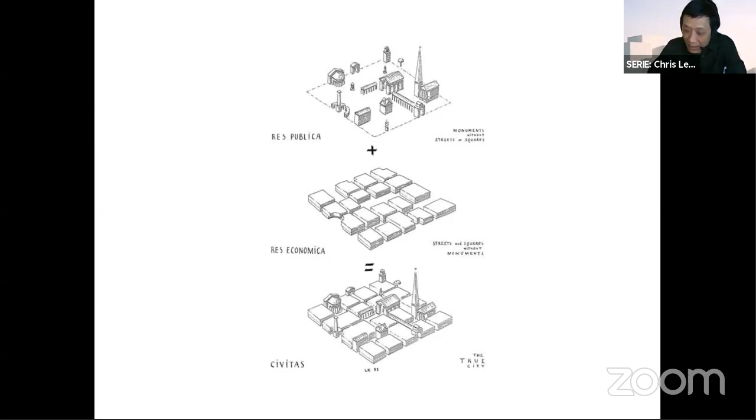Now, a very good example, and I find this the most instrumental part of Rossi's work, is the Palazzo in Padua, which he says is an urban artifact because it's both permanent but also evolving, propelling. That's because the palazzo has been able to accommodate changing functions or programs within the building. It has changed from an aristocratic residence to army barracks to a market to a school and vice versa. And because of that, the structure is actually independent of programmatic failures and redundancy.

So because it is a structure that is permanent and allows the program to evolve within it, it is involved in the evolution of the city and also permanent, thereby holding and accreting the memory of the city.

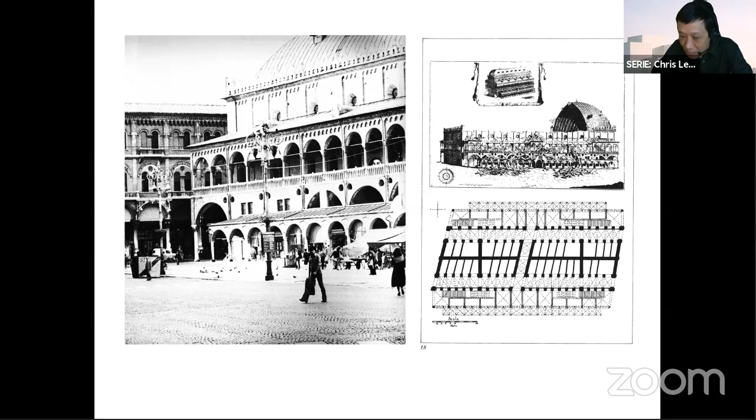One very crucial aspect, which you see at the bottom right of the drawing here, is the diagram or plan Rossi extracted from this example. It is basically the dividing walls and the series of colonnades that the palazzo holds, and it is this very same structure that Rossi used again and again in his first three projects in the early 70s.

So in the first project, even he says this, it is essentially the same deep structure that is transposed to become a Milan Triennale project, in which the same walls that you see in the deep structure diagram that Rossi uses here are elongated, and in which the width and distance between the walls contract and expand to create at some parts incredibly wide and open spaces, and at certain parts become incredibly and unusually narrow

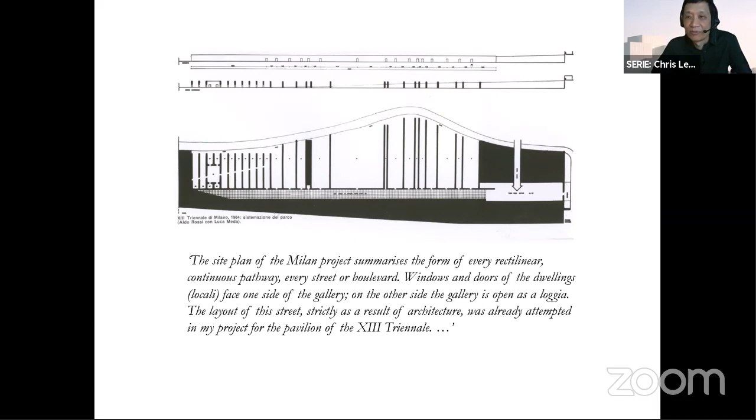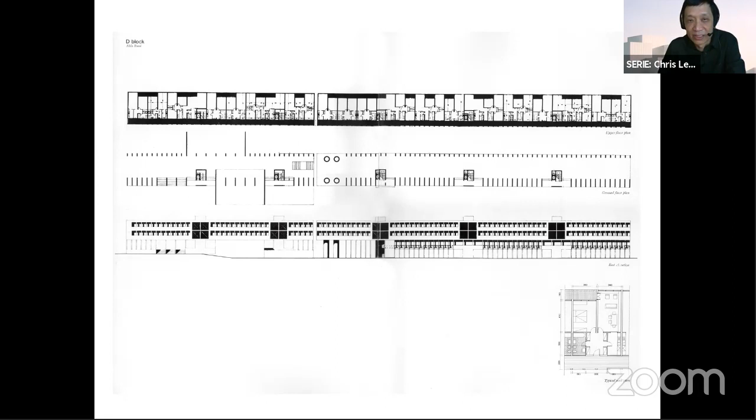And the same structure then is imprinted on the ground as elongated walls, as porticos, as a colonnade. So thereby bringing two moments, the moment of housing and the moment of the city, as the colonnade of the city, into a single moment of architecture. So I think it is here, in Rossi's project, that he draws on the lessons from the persistent architecture of the city, and then retransposes them as a moment of both housing and monument, vis-a-vis the architecture of the city itself.

So I think this is incredibly instructive, where the resultant architecture could be seen as an open framework, an architecture that frames, but also is open for programmatic permeation and for social life to unfold. So now moving on to another example. Now this is looking eastwards, moving from the west.

Now if I were to say that the deep structure of the historical European city can be understood as the dialectics of rule and exception, right? Housing and monument. Then the Chinese city, I argue, is constructed out of just one dominant type, the courtyard house. Or to be more specific, it is essentially the deep structure of the walled pavilion.

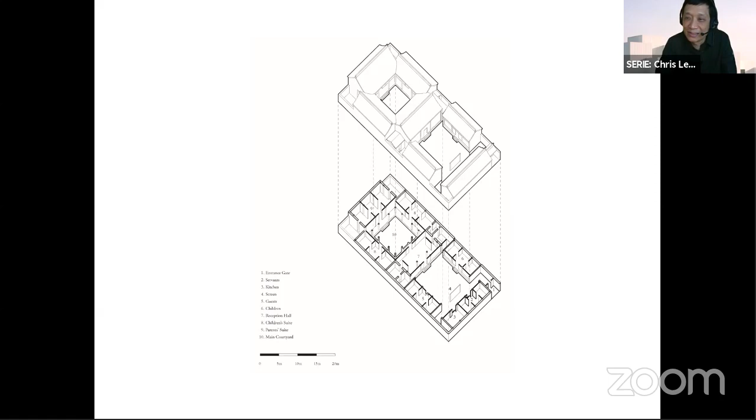Now, the Chinese courtyard house therefore should not be confused with all other courtyard configurations the world over. The most pronounced difference is that the void of the courtyard is not carved out of a mass. Instead, it is formed by the placement of one or two-story single-room pavilions that are then walled off from their surrounding. These courtyard houses aggregate to form entire neighborhoods. In Beijing, they call them hutongs, leaving very narrow lanes between the courtyard houses.

This is also because the Chinese courtyard house does not have an articulated frontal elevation, for it will never be viewed in axial perspective from a distance. Instead, it is always experienced in sequence, where one moves from wall to courtyard to pavilion and yet to another courtyard, and the sequence continues. So this sequence of open and closed space, a space for nature and dwelling, in a sense reifies the very concept of yin and yang, that is to say the alternation of binary opposites.

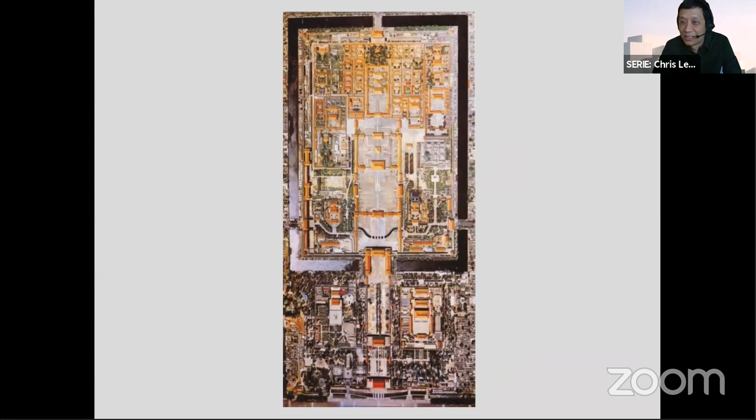So this singular deep structure defines the entire city at various scales. For instance, you see the city of Beijing from the Ming dynasty onwards and pre-1948, a compound. And further down, of course, the walls of the neighborhoods, and finally the walls of the courtyards.

Chris, we lost connection for a minute, so we couldn't hear. We couldn't, really? For a minute? That long? Well, no, maybe 30 seconds. Only from that slide. Only this slide, yeah? Okay.

Onwards to 1948, for instance, it is defined by various city walls, right? One that defines the extreme border of the original city, and the other wall on the south defines the extension, and then the scale down. Here you see it then encloses the imperial compound, and further down the walls of neighborhoods, and finally the walls of the courtyard house itself. So they all demonstrate the same deep structure, that is to say walls enclosing an agglomeration of pavilions.

Now, another important observation that can be made here is that the deep structure of the city here is the same as what Rossi has said. This is independent of program. That is to say that the same courtyard house serves as dwelling for families, for administrative offices of the state, schools, clinics, clan associations, and the multitude of social and cultural life that you find in the city.

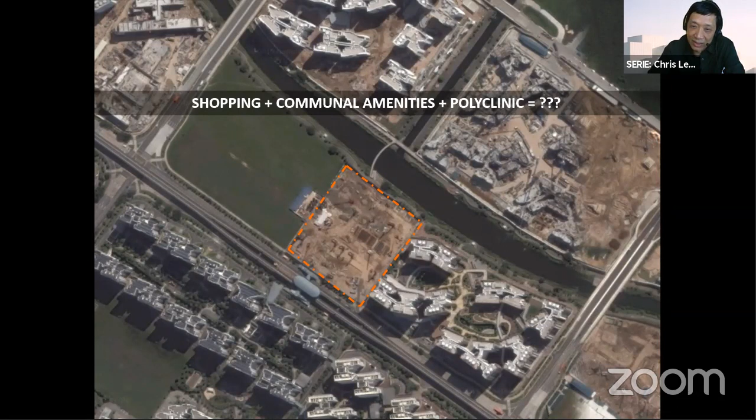Essentially, it's an integrated neighborhood center that will bring together communal amenities, shopping and polyclinic, sandwiched between an LRT station and a waterway. And the focus of the brief, unlike, let's say, other developer-driven commercial development, is to provide great public spaces to strengthen community bonding in the large HDB estate.

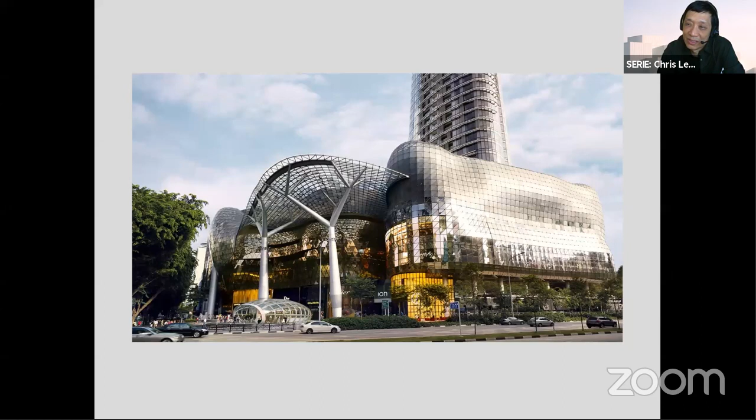So looking at Koolhaas in his Harvard Guide to Shopping, he wrote that, quote unquote, shopping is arguably the last remaining form of public activity. So although insightful in certain measures, I do think that there are other ways in which public activity could be nurtured. However, to date, the architecture of shopping in Singapore is this. It's a ubiquitous shopping mall, superfluous monuments of consumption as public activity. So its role really is to internalize all activities, drawing lifeblood from the streets and the city itself.

So the main challenge for us for this project is therefore not only to bring these three very, very different programmatic components together in a new building typology, but also to harness an architectural grammar that could create meaningful communal spaces, and through that to script a programmatic strategy that could foster a sense of belonging. So where do we start? And where do we look for precedent?

So we thought that with more than 80% of Singaporeans living in public housing, the architecture of this housing has grown over the years and could be termed as a common architecture, right? An equalizing artifact that is able to accommodate the plurality of life. So this architecture of HDB is actually very, very unique, at least in Singapore, although they draw a lot from architectural modernism. And what I find interesting, especially those that arose in the 70s and 80s, is that it has this quality of an open framework as an unassuming structural expression of what it contains.

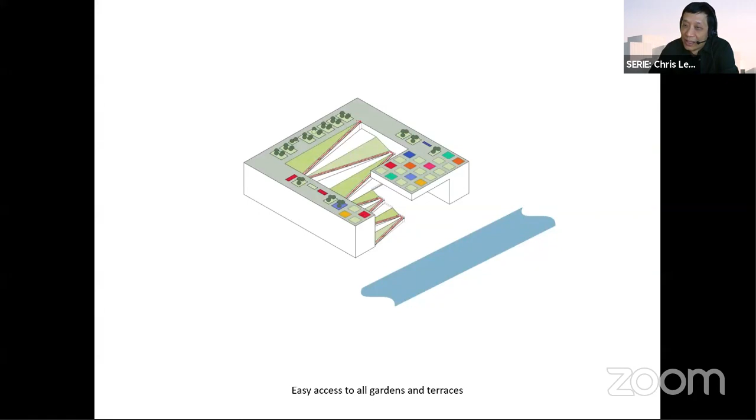So our first thought was that the neighborhood center should be conceived as a singular building that frames and cradles a garden. The garden fronts the waterway, creating a natural amphitheater towards the water edge. This garden cascades down the entire height of the building and draws program and dining activities to the water edge. A gentle ramp provides easy access to all gardens and terraces, and they articulate the surface and slope into several terraces. The plants define and shade each of these terraces, and every level on the wings of the building has direct access to these gardens.

So shopping is visible, it's vibrant. Eating activity spills out onto the veranda, but they never drown out the public realm. And the terraces are filled with outdoor communal spaces. Here, a children's playground next to the pediatric clinic. And as the garden matures after a year, you see that the ramp now cuts across the different terraces, with each turn revealing different pockets of communal spaces, a hammock, a seat, a platform to stretch out, and so on.

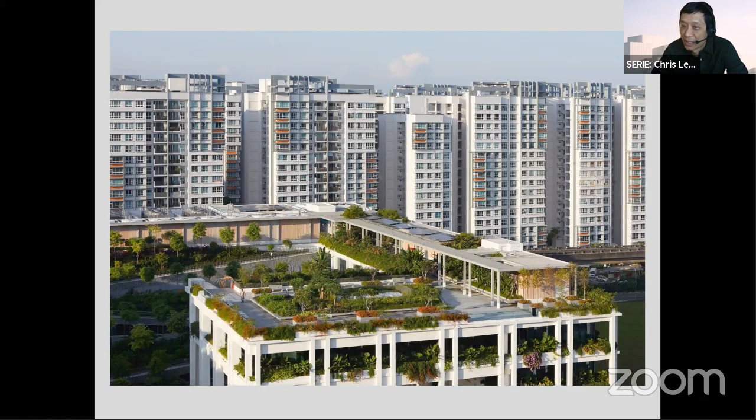And upon reaching the roof, as you turn your gaze back onto the terraces, enchanting views open up to the waterway and beyond. So the terraces here continue to the roof and are used as urban farms for the community horticulture clubs and also exercise areas for senior citizens.

So together, the communal spaces envelop the entire project and are accessible from the ground all the way to the roof. Now, upon framing the cascading garden, the second act of framing defines the sheltered community plaza. So this is a well-defined volume, 4 stories tall, and is sheltered from the elements. The pedestrian circulation is threaded through its sides so that meaningful space could be defined for public use.

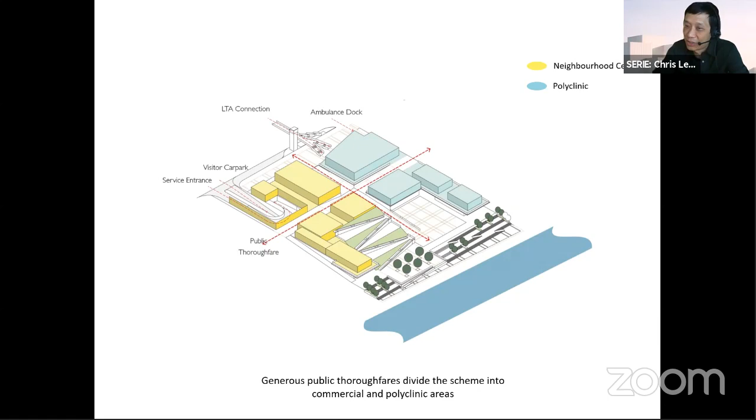A generous public thoroughfare divides the scheme into commercial and polyclinic areas, and the pedestrian path links the neighborhood housing sites together and stitches them as a collective whole. And it draws pedestrian movement from the station and Punggol Drive.

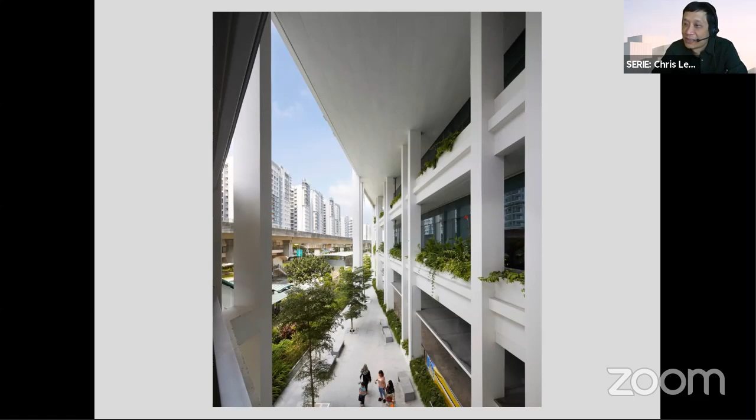The entrance is accentuated by gently angling the facade facing the station, and it creates a doorway into a triple volume entrance and a funnel space that then leads pedestrians onto this 4-story height sheltered space. And this volume is also strategically placed at the crossing of the waterways and the landing of the pedestrian bridge.

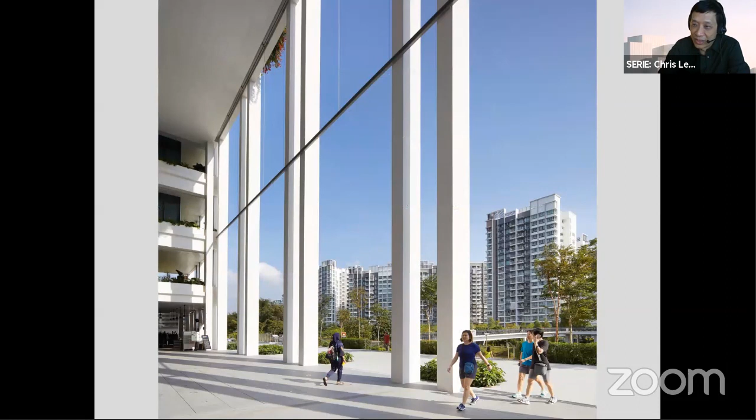And the space is framed by a set of double columns, giving it an open facade with a plaited grid of an AB rhythm. And when it rains or when the sun is at its most searing, blinds will drop to further shade the space. So this deliberately porous facade both defines and allows the permeation through this threshold. And this portico entrance really, for me, gives a sense of dignity as one passes through the threshold of the space.

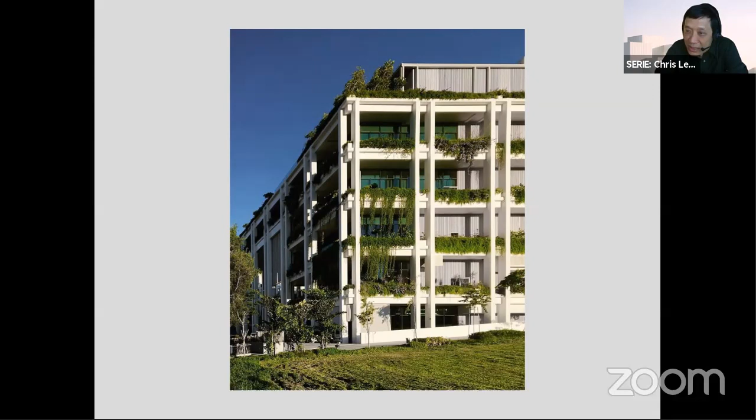And as each floor is surrounded by open terraces and hanging gardens, which overlook the garden on the platforms, they also become a key feature of the elevation. So this third element, which is the facade, thus possesses a depth that overlays the vibrancy of its content with the nature that surrounds it.

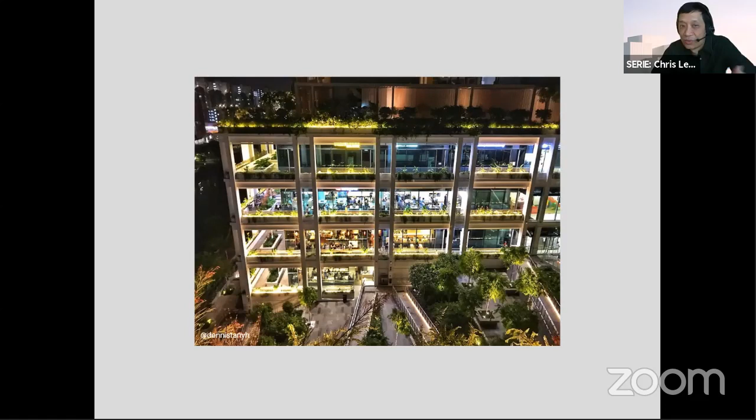So this depth also translates into veranda spaces for communal dining, and it activates and spills out to enliven the facade of the project. So here, for instance, you see the dining gets activated after the sun goes down. The verandas are also sheltered from rain by using roller blinds. So here is when the blinds are fully drawn, and the service facade is clad with precast stained concrete, and together with the double columns, I think it does offer a certain richness and animation to the face of the building.

So on a meta level, this illustrates what I've been talking about previously, that the project is seen as having a wider role. In a way, it conceives and cultivates a sense of commonality. More often than not, you see that architectures that are restrained, rational, repetitive are criticized or derided for their lack of exuberance. But precisely, I think these are the very qualities of the architecture of public housing in Singapore. And we should understand that this architecture is mute, but one that also enables the color of life to flourish.

So similarly, the cultivation of a community and sense of belonging requires a common framework. So it is precisely this that we wanted to distill and revalidate into our own architecture, very much like what I would think Rossi would have done.

Second project before we break for another translation: the new School of Design and Environment in the National University of Singapore. The site of the project is located at the south end of the existing school that was built in the 70s. And the available plot is actually very tight for the additional building. Looking from the approach to the south, the site is a small hill surrounded by mature rain trees.

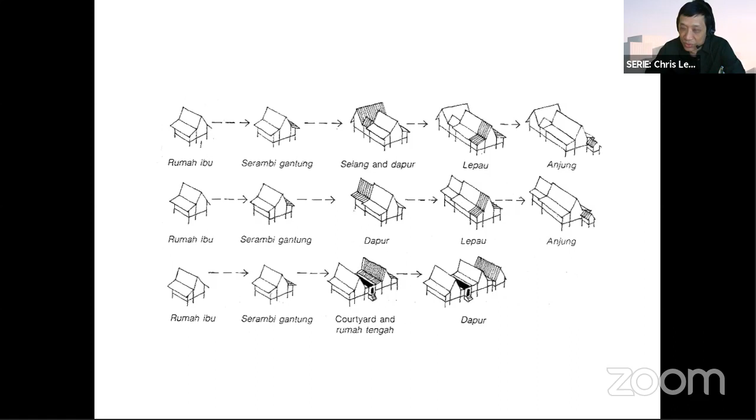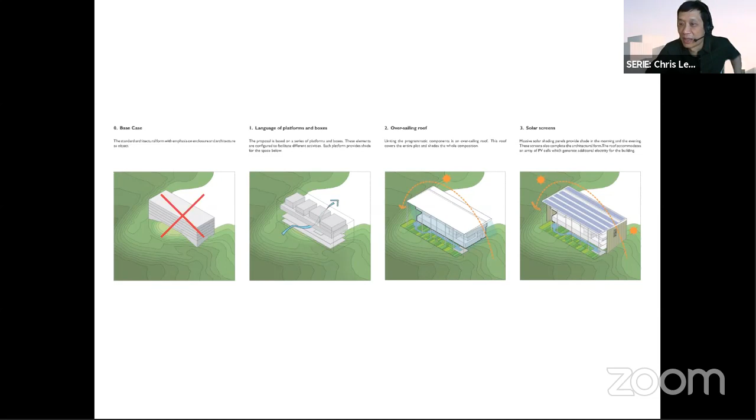Now, perched on top of the hill, the new building is composed as a series of boxes loosely placed on a large platform. A large roof shields these rooms from the overbearing sun and harnesses its energy. And a large 5-story screen which buffers the spaces cuts away the direct east and west sun. So the result is a school that is very clear and very legible in its organization. It's open, it's permeable, and without the associated heat gains that you find in the tropics.

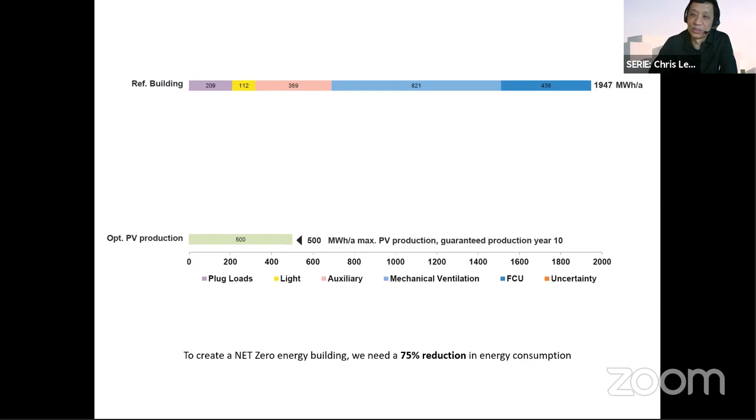And the completed building, as you see here, just completed last year, is perched just above the tree canopies. The large roof is used as an expansive solar farm as well as a teaching space, where a total of 2,444 PV panels are placed. Now, the maximum energy the PV cells can produce based on the limits of the site is just 500 megawatts. However, an educational building of this size typically uses close to 2,000 megawatts. So to create a net zero energy building, we need a reduction of 75% in energy consumption.

The conventional approach to cooling buildings in a hot, humid climate is usually to use an operative temperature of 24 degrees. However, if we instead use what we call an adaptive comfort approach, we can use an operative temperature of 27 degrees together with tempered and moving air. In other words, we feel thermally comfortable if we can remove heat from our body, rather than the conventional approach of blowing cold air onto our skin. And this is where the energy saving comes from.

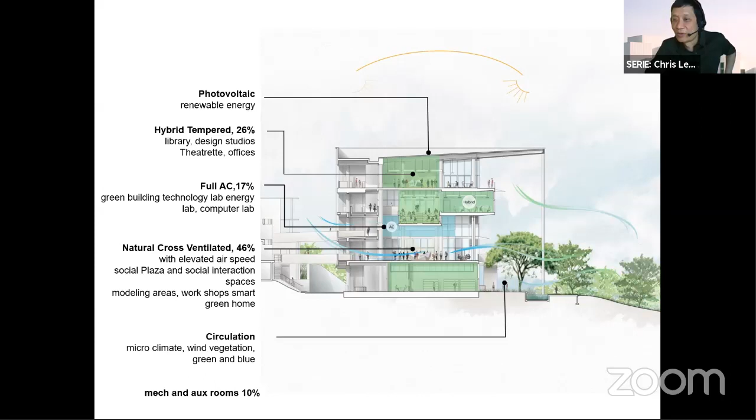So sectionally, the spaces are configured to be very shallow. The building hovers above open platforms, allowing natural cross ventilation to cool the spaces, so that it utilizes only 17% conventional AC cooling, reserved for labs. 46% of the cooling will be through natural ventilation and 26% from hybrid cooling. As you see in the graph, relying largely on how we design and arrange the volumes and using platforms and overhangs, we were able to achieve close to 75% energy saving, with 76.5% saving from the cooling loads alone, bringing it all the way down to a net zero energy building.

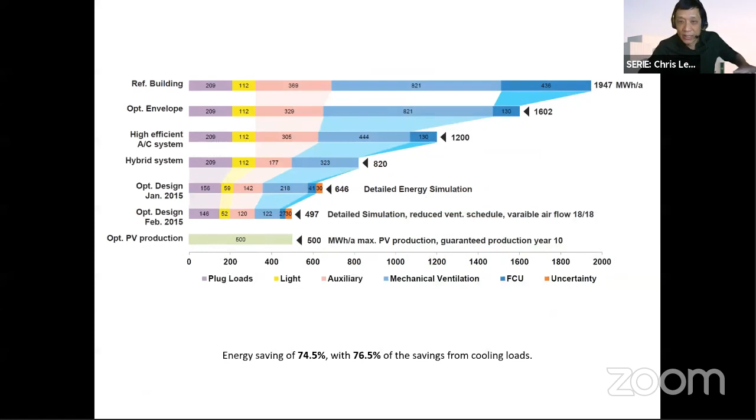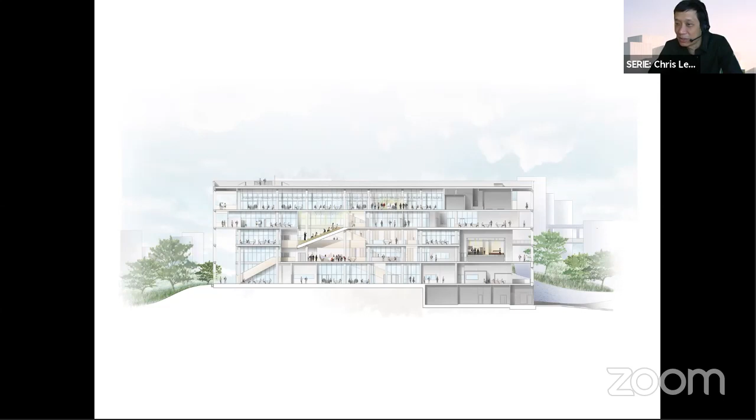Here you see in the section the crit space dropping down into the raised social plaza so that it is visible from all approaches to the building. This space is also directly next to the open studios and main circulation spine in the foreground, so it's the most visible part of the city. We felt it's very important that the act of presenting, debating, and winning over an audience is central to the life of the school.

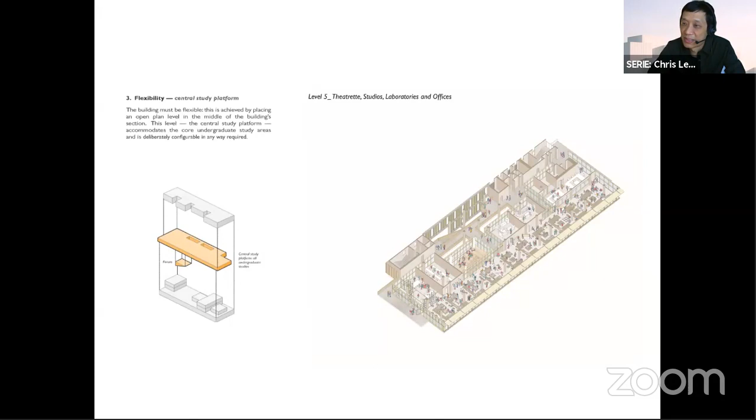There are 2 types of studio spaces here. The first is contained within the large platform with the largest floor plate, organized in 3 bands: services, circulation and chat facilities, and open studios used by the lower years. The studios use hybrid cooling, as I mentioned, from 12 to 5 p.m. and natural ventilation in the late afternoons and early evenings. So the studios, despite being in the hot tropics, are incredibly light-filled and transparent, with open views to the sea, and yet suffer no direct heat gain from the sun.

So the platform is lifted, clearly visible from the approach to the university, so that the life of the studio is visible from the campus. And above the platform, studios are almost like they sit amidst gardens with large overhang roofs that provide shelter from sun and rain, and also creating very pleasant breakout gardens fronting the studio.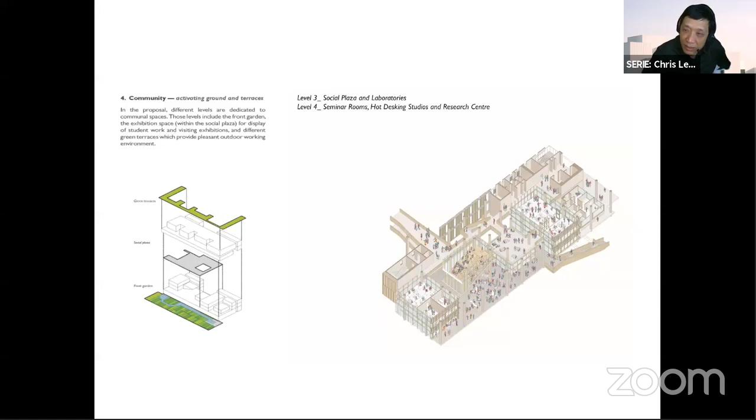So these spaces will be used by postgraduates and researchers. They are more room-like, very, very pared down in terms of its finishes. And the third space: we learned that as working and learning becomes increasingly collaborative and therefore social, spaces will also have to cater for that.

So here, the social plaza is surrounded by shared amenities like labs, seminar rooms, a library, hot desking studios, exhibition gallery, and a cafe. So that users of the building, as they approach it from the bottom of the hill via this tube-like staircase framed by a 6-story portico and mature rain trees, will arrive at a social platform at the level of the tree canopies. And here, approaching also from the existing building from the south, it also culminates on this level, a space that opens up to the landscape and the sea beyond it.

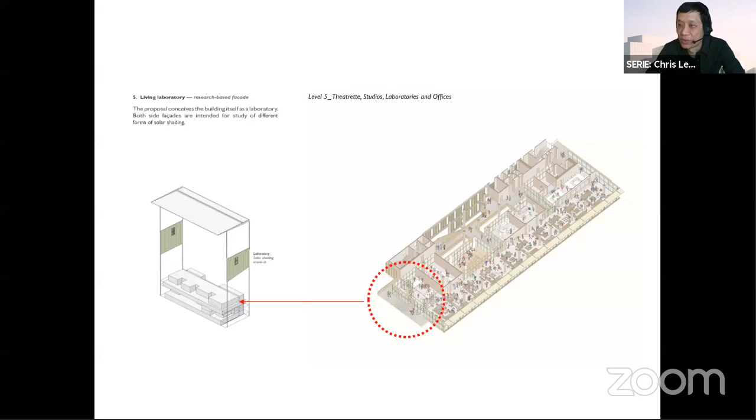So all mature trees, rain trees, were protected and preserved in the making of this building. And the building is also conceived as a living laboratory where the east and west facade of the building, where it's exposed to the most searing sun, is actually clad with a perforated aluminium curtain. And these curtains and facade are actually demountable so that students and researchers could mount their prototype facade to test against the sun and rain.

And the soft irregular folds of the aluminum panel for us is almost akin to a curtain, and it brings a certain softness and delicate expression to the building. So looking from inside, they act almost like day curtains, modulating the sunlight and also keeping the rain out on the interstitial spaces. So yeah, maybe I stop here.

Yeah, yes, I will make a summary about both projects.

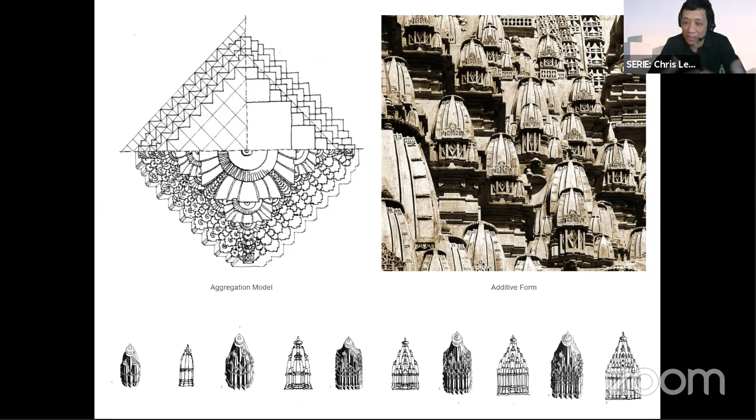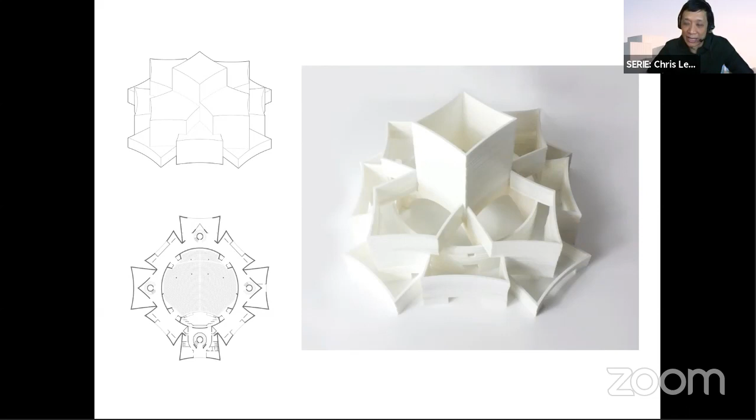Therefore, it is not surprising that this concept is very evident in all Jain temples around the world, where the aggregation of self-similar elements creates the shikara that reaches to the sky. The shikara is not only a tower, but also an agglomeration of motifs that creates the temple itself. So our response was that the satsang hall consists of 13 stacked rooms, and as they stack, the rooms get smaller the higher they go.

This rotation of the rooms also aligns to the cardinal axes, so the entrances to the building: to the temple on the right, the dining hall on the left, and of course the amphitheater and entrance that faces the valley. As the rooms are rotated and stacked at 45 degrees as they go up, they form an incredibly beautiful agglomeration of rooms and forms. As they rise, it almost becomes the shikara I was talking about, but without the level of ornamentation you associate with the Jain temple.

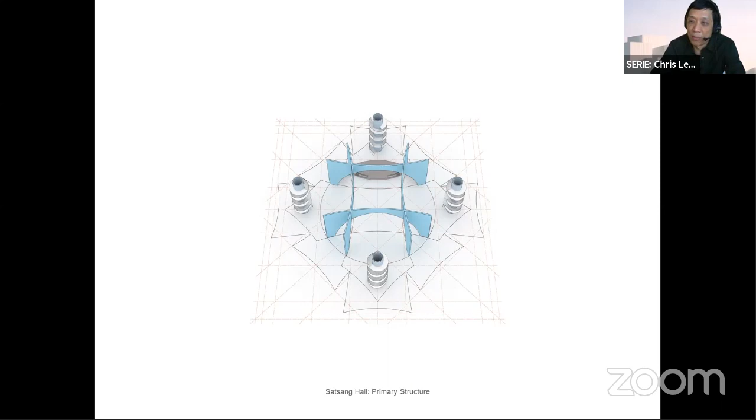When completed, the building will be clad in hand-chipped marble strips, 300 long by 50 wide. As the largest hall, with a sitting capacity of 5,000, it is placed on the ground floor, and 4 large, slightly curved arches transfer the entire load of the rooms above. This creates a column-free drum with a 55-meter diameter span.

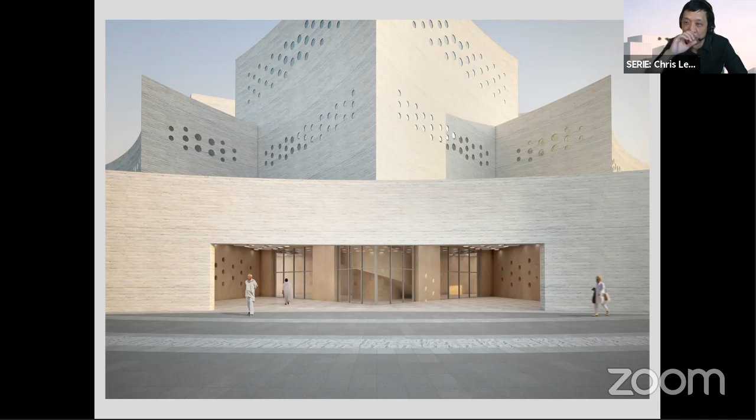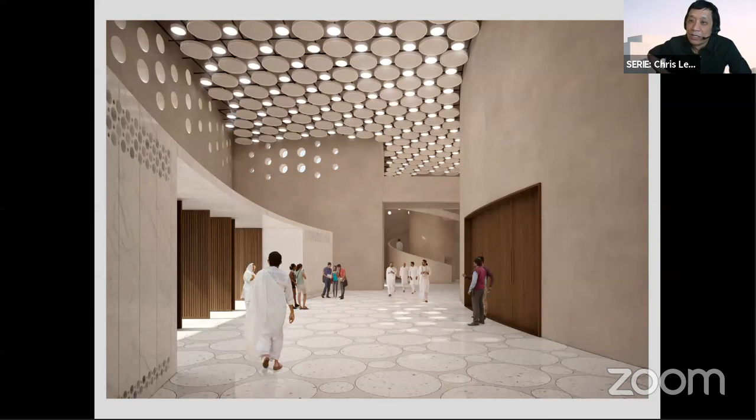The main foyer is accessible from all 8 corners of the building, and the main entrance facing the valley is formed by 2 angled vestibules. The rotation allows this vestibule space that lets men and women enter separately, but they are never segregated spatially. When you enter, the drum is immediately visible and felt in the foyer, allowing very intuitive wayfinding as you navigate through the space.

The main discourse hall on the ground floor seats 5,000 people, column free, as I mentioned. The stage is slotted into the 4 arches I was talking about. On one side of the drum, a perforated timber panel acts as an acoustic baffle. Devotees sit cross-legged on the floor; there is no seating in this hall itself. Everyone sits on the floor.

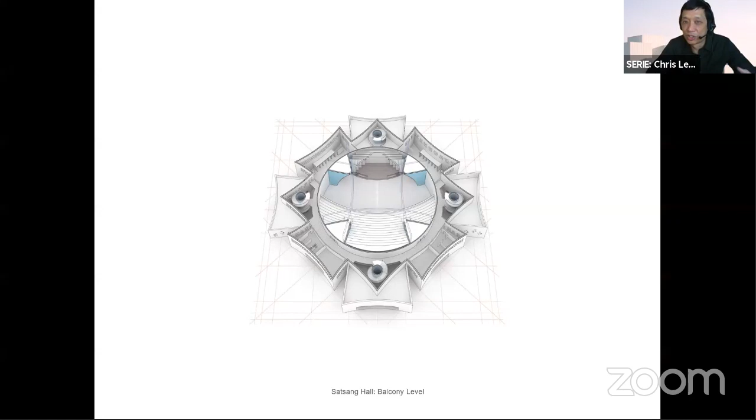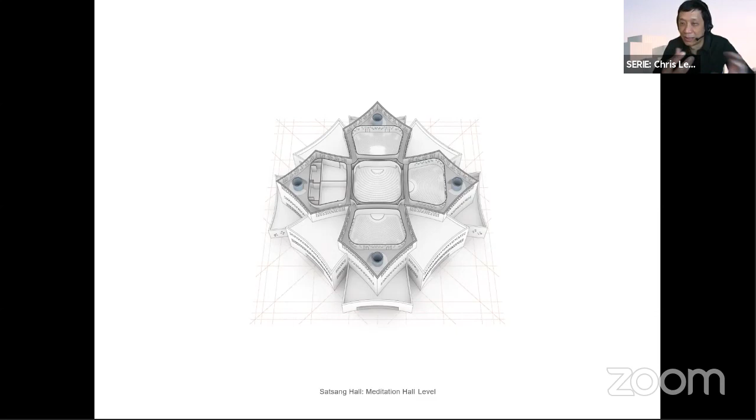As you navigate through the building, 4 circulation cores connect the ground floor to the upper level balcony and further up into the classrooms. Then, as the building rotates and aggregates upwards, to smaller meditation halls, finally culminating in the main meditation room, the most sacred, with the tallest volume. Here the volume tapers upwards and ends with a skylight.

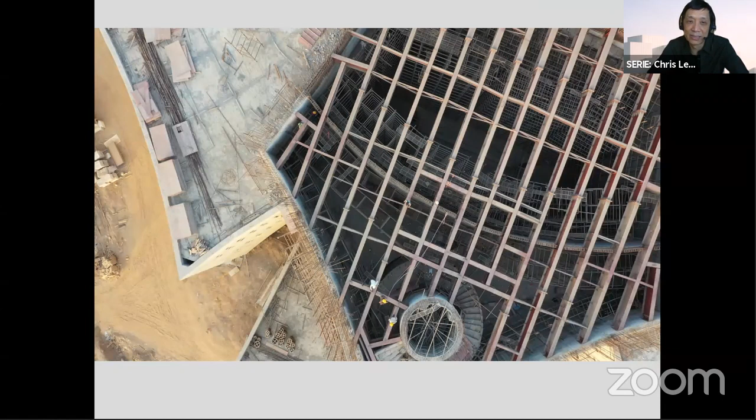This was taken about 8 months ago, before construction slowed down due to COVID. You can see the rotation of the rooms already on top of the crescent, and you can almost see the arches taking shape. Here you see the drum inscribed and holding up the different rooms as they begin to rotate upwards. This is a more detailed view showing the circulation drum and the various voids of triple height, double height, and single height collapsing into a single space.

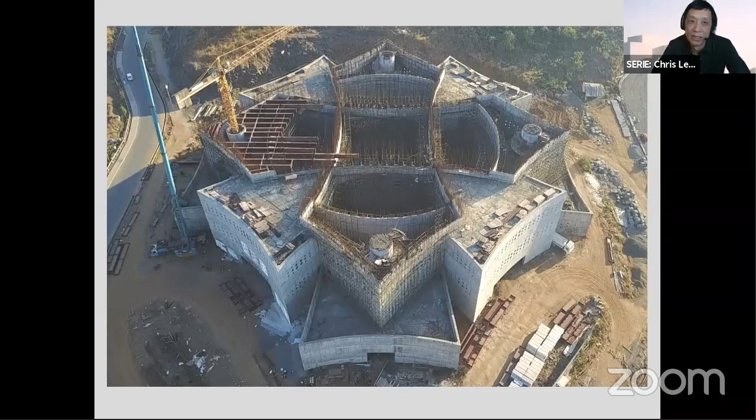This was taken about 4 months back, and you can already see that we are reaching the final top of the roof. Here you see the different volumes now collapsing together. These are the openings that you see moving into the halls.

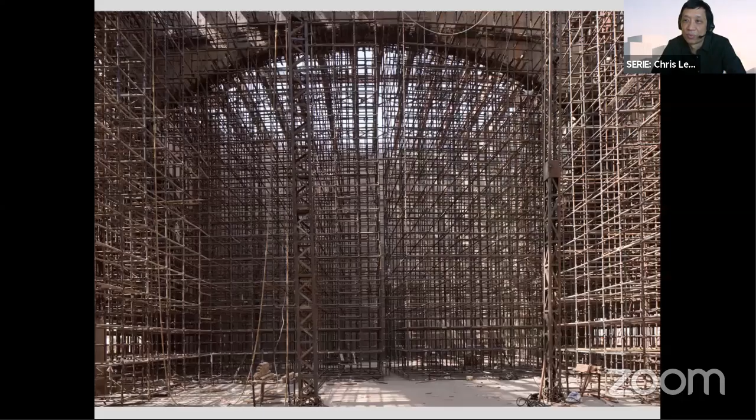These are some of the tests of the different apertures and the way in which light is brought in where it's only required. Sun is very, very harsh there, so the modulated light is very important. So here is the large 55 meter singular span space that I was telling you about. So you begin to see here the arches, and this is where the arches begin to culminate and meet.

So Tristan, should I stop here or should I move on to another project? You can move to the next project and I will translate the two together. Okay. All right.

So from India, let's move to Dubai. This is the Jameel Art Center. It was a competition that we won. It was completed in late 2018, so more than a year ago now. It's located at Dubai Creek, just at the tip of this island here. So this entire village here is called Culture Village, and the Jameel Art Center is meant to anchor this entire development and neighborhood, and becomes the key cultural building in this new place.

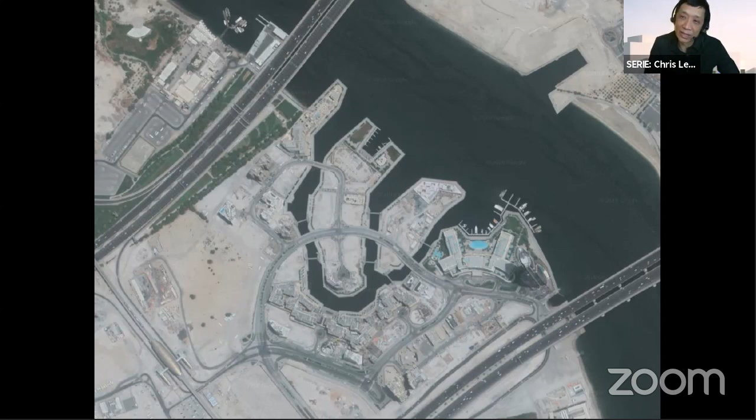So when we were invited for this competition, we were very impressed by the brief by the Jameel Art Center Foundation, where they really stress two things. They say that this art center should not only celebrate art, but it never should become a building or an art institution that is aloof and cut off from its community. So the building must give equal weight to the role it should take as a community center, to drive community, cultural and social initiatives in Dubai.

So we thought that these two ambitions have to find their resolution in a single type. One of the best examples we could look at is the Shabi housing in the Middle East. This is in Dubai, in the Emirates, built in the late 60s, early 70s. They are government housing. Essentially they are a series of walled houses, where the house is composed as a series of loosely placed rooms, and one would move from room to courtyard to room. This typology is both intimate, a private dwelling space, but also brings together a social space, a common space within the same building type.

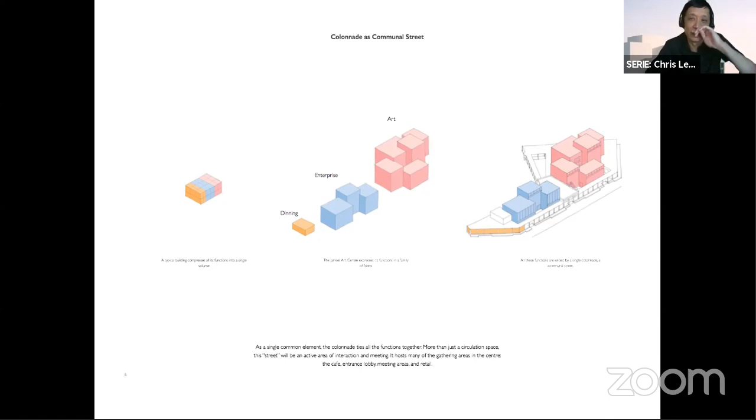And of course, as this Shabi housing aggregates, the self-similar structure begins to create squares, mosques, and so on. So the way we translated this into the Jameel Art Center is that the building is composed of loosely placed boxes that come together to form three different clusters. The first is a cluster of gallery boxes that defines a courtyard. The other is enterprise spaces for administration as well as artists in residence, and the other is amenities, restaurants, cafes that serve the building. Tying them all together is a flat one-story colonnade that makes the ground floor behave almost as a mat building.

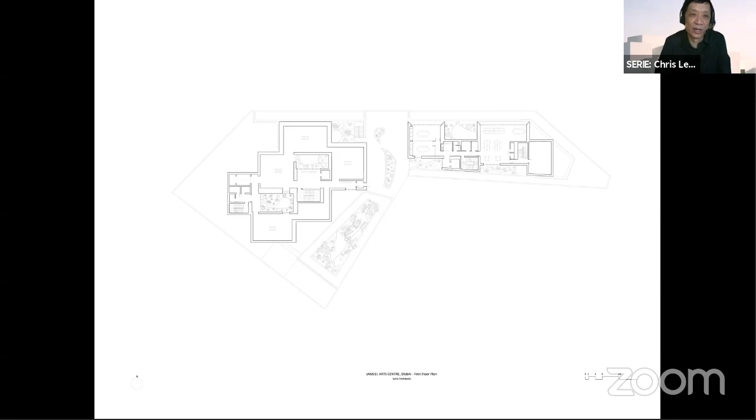So this is when it was built. You can see that the mat building and colonnade really tie the loose agglomeration of boxes together. It defines a very clear edge of the building in response to the clear edge of the water promenade. On the ground floor, it also crucially introduces key open spaces or framed courtyards between the site and the edge of the building. You see, for instance, here the forecourt, and other courtyard spaces bounded by this edge. This colonnade is incredibly important to us because it allows program to spill out into the very skin and edge of the building, animating the waterfront promenade and making the building completely transparent and open to programmatic permeation.

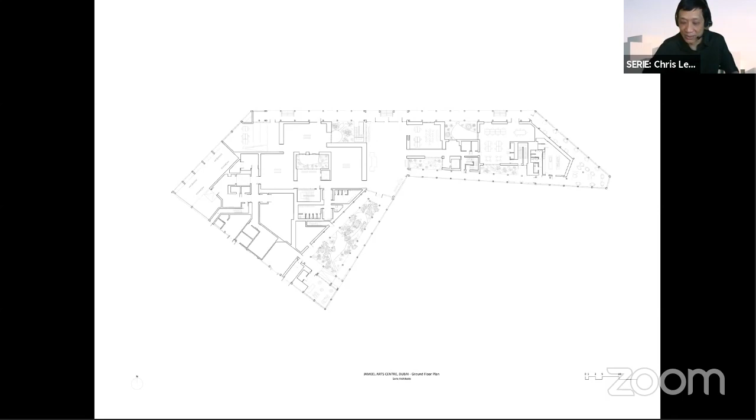So on the ground floor, you approach the building in what we call a very poché space, very, very porous. All around, the building is very open, filtered by the colonnade and then the open courtyards. So here, for instance, you approach the building from the plaza, and immediately you see the screening of the courtyard by the colonnade itself. And on the water side, the colonnade activates the space, and one of the entrances also fronts the water itself.

So the courtyard of the building is very, very important. So we worked here with Anouk Vogel, incredibly talented landscape architect. And when we worked with her, we did tell her one of the key criteria for the landscape design is to look at the courtyard not only as a key social and common space for the project, but almost as blank canvases, in which you could assemble a landscape design. So she reacted to the brief incredibly well,

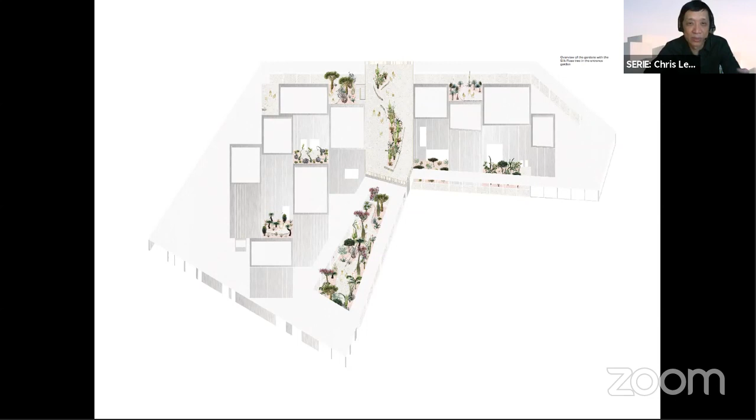where she used the 7 different courtyards that are scattered around the building as a canvas that hosts desert plants from different desert biomes around the world. So the 7 desert plants are brought into each different courtyard. So here you see, this is the first forecourt that you filter through the colonnade. And here the different plants are almost treated like sculptures being composed, and the path begins to weave through them. So this is the first space that you encounter as you approach the building. It filters you through the colonnade, and from then on into the lobby space itself.

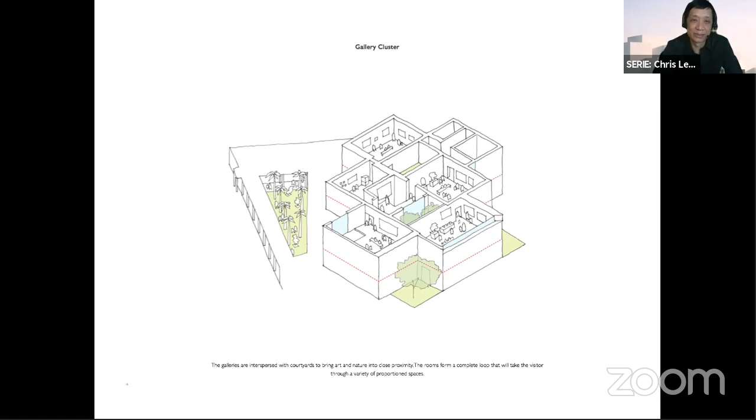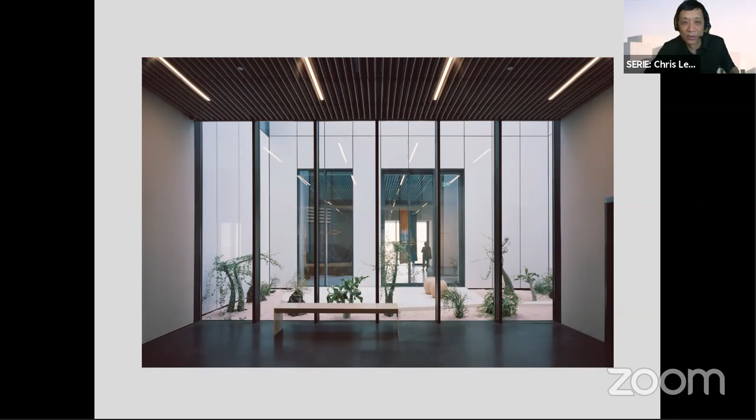And moving from here, the galleries are placed in such a way that they surround different courtyards, and as you move from gallery to gallery, you are always confronted with the view and access into the landscape courtyard, so that the appreciation of art and nature becomes a singular experience. So here it's the view out from the main entrance into the gallery itself. So again, you see that the plants here are treated as a sculpture and a piece of work of art itself.

So from here you move on into a gallery space, and then from each and every gallery, as you move from one threshold to the other, you begin to see a glimpse into the courtyards, and doors begin to invite you into the courtyard. So as you move into the courtyard, you really feel a certain oneness with the plants, because you are at once cut off from the exterior, but only with an access to light and air and breeze. And you could really appreciate these moments with the plants themselves.

So the very beautiful courtyards are also placed next to the colonnade and reading rooms and libraries, so that there's this in-between sculptural space. So these courtyards exist on different levels, on ground as well as on the first story. And as they come together, we thought that it's quite a beautiful form, the different agglomeration of the galleries. This mute architecture, this architecture's framework, really stands in contrast to the exuberant architecture that we often associate and find in Dubai. So yeah, maybe I stop here for a bit.

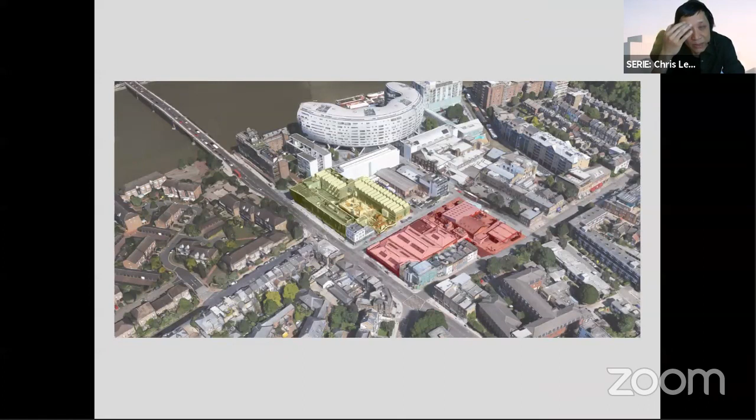So in this brief for the invited competition, we were asked to expand the school. What you see in yellow, that's the existing school. So there are two strip buildings fronting just next to the River Thames. And here is a series of disused warehouses and workshops, in which the L-shaped site became the site of the competition itself. So RCA, as you know, is the Royal College of Art. It's a multidisciplinary school with fashion school, interior design, architecture, product design, and so on.

So when we first started the competition, we thought that the students at Battersea South Campus actually have competing and often contradictory spatial needs. On the one hand, they do need a large open space that encourages discourse among students. And the other is a more private area for frank discussion and quiet study. So in other words, the precedent that we could draw on is really both a factory floor and a studiolo, that is to say a studio within a larger space.

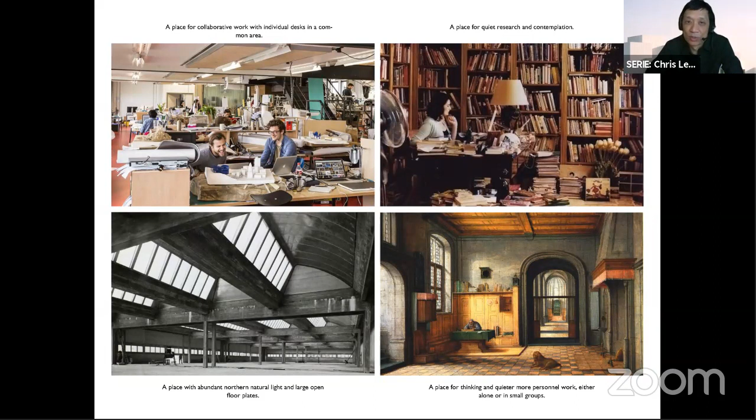So the project uses therefore these three elements to define the project. The first one is the use of a table structure. What we felt was incredibly instrumental about the table structure is that the table defines a space, but it never encloses the space.

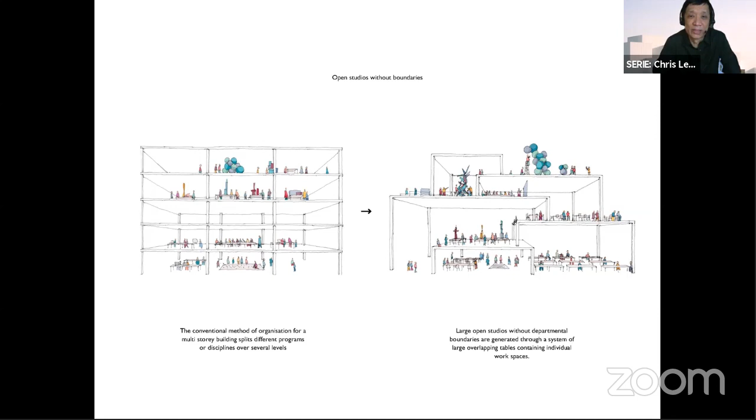So if you begin to compare the stacked tables to a conventional stacking of floor plates in a gridded building, on the left, you'll always get faculties and schools that turn into silos because they are never connected visually or physically, and they become these disciplinary silos that never learn and interact with each other. Whereas if we think about them as a series of stacked tables, each table is then taken by a single school or a single faculty. This school is defined within the table structure, but it's always visible and permeable from one table to the other.

So that stacking of the tables becomes the way in which we define the different schools in the school itself. When the different tables come together and form the complete school, it becomes almost an emblematic spatial image as well as an experiential space that really figures forth the richness of the disciplines that exist in RCA.

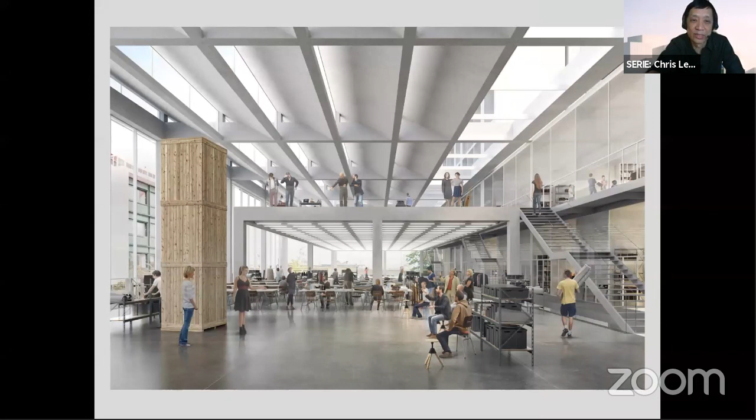So here, for instance, you see that when the tables are put together, a sculpture student is making his presentation, and a different school, let's say the architecture school, could look down and begin to enjoy the spaces. And moving further up, here you see a sculpture student working on the highest table, with clerestory lights filtering light deep into this open span space, almost 20 meters wide.

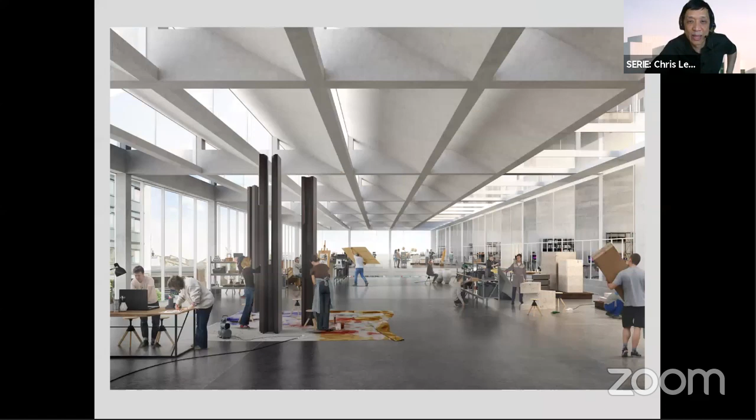So the second element that we introduce to create the school is what we call a shelf space. What is important for us is that the shelf provides a neutral framework so that different activities and events of the school could be displayed in a very prominent and democratic way.

So again, if you compare with a conventional stacked school, and you were to place different resources, let's say seminar rooms, laser cutters, and so on, on different floors, very quickly these resources will be co-opted by those different schools because of their proximity and because these resources are cut off from one floor to the other. Now, instead, if you were to place them in an open, democratic shelf in a free way, these amenities and resources almost become a very democratic approach to their allocation.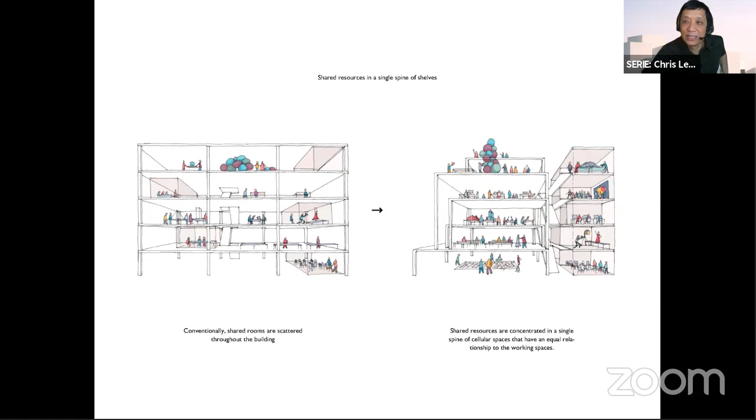So in the sense that they are placed next to the table and have very easy access to this. So as a whole, this shelf becomes almost an urban tableau where all the various activities that are shared in the school are visible on the very elevation of the city.

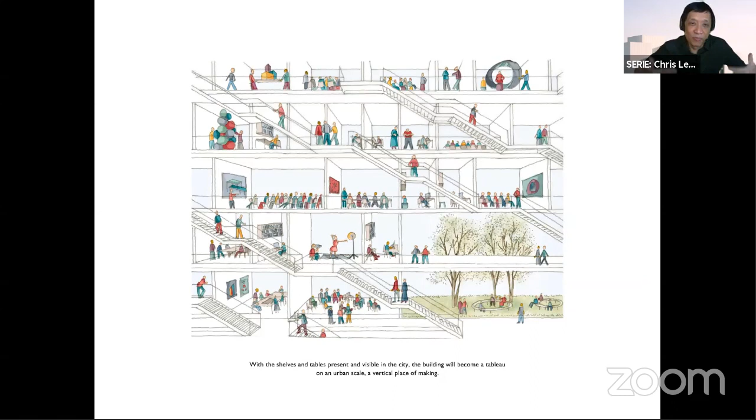And completing the building is a final layer of staircases. Here we place a lot of staircases, more than is required. But really the key concept here is to allow maximum penetration and access between the table structure and the shelf structure, the studio space and the studio loft that I was talking to you about.

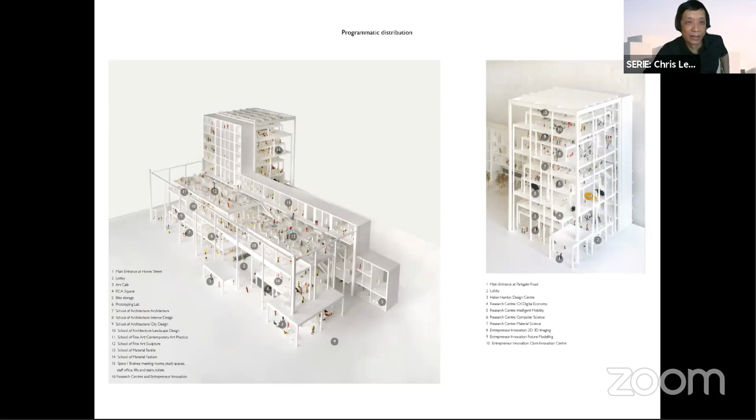So the plan is incredibly simple. The staircases separate the table and the shelf, and the tables are placed in two configurations. So these are the schools and the tower, which is the stacked table, that's the research center. And when placed together, the overlay of the two types that I mentioned to you, the factory and the studio loft, comes as a complete whole.

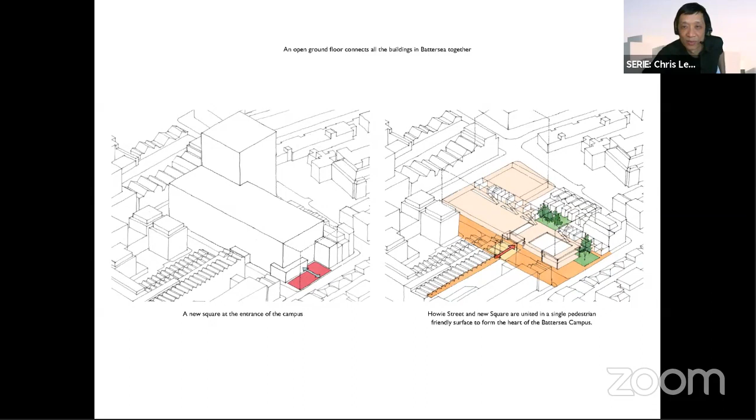So in its placement on site, the approach to the site is two ways. One is along Battersea Bridge Road, where we set back the building with a forecourt and also activate an existing entrance to the school and align it with the lobby as well as the back gardens of the administrative building. So as you approach from the west, you get a forecourt and a cafe, a table entrance, and from the cafe onwards, you begin to enter the building.

So you see the first table that houses the workshop, the digital workshop and fabrication workshop, and above you begin to see the tables being stacked above. If you enter from the existing school from the north, you will begin to enter into the main lobby and the garden space towards the right, and then your eye basically glances upwards as the tables begin to stack upwards, and of course the access is incredibly

permeable. So as a whole, Howie Street, which is the street between the new and the old school, will be completely pedestrianized, and we feel that the way in which the table structure comes together really brings out all the diversity of the disciplines that we find in the school, and really it declares the potential for the students.

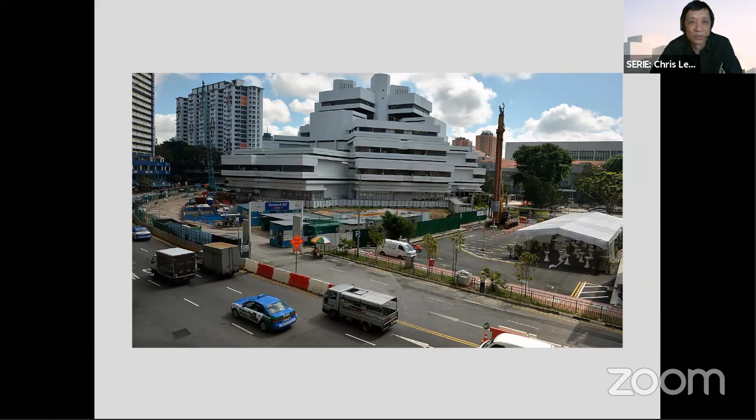And the competition site was to really look at this plot of land, but with a very, very high GFA, or gross floor area, of 150,000 square meters. So now the key to designing courthouses, and why this courthouse is so solid, is because in courthouse design, you must make sure that the circulation for the judges, the public, and the defendant, the accused, is separated. So that's why you see here these little corridors with very, very high walls. These are the three different circulations that are segregated.

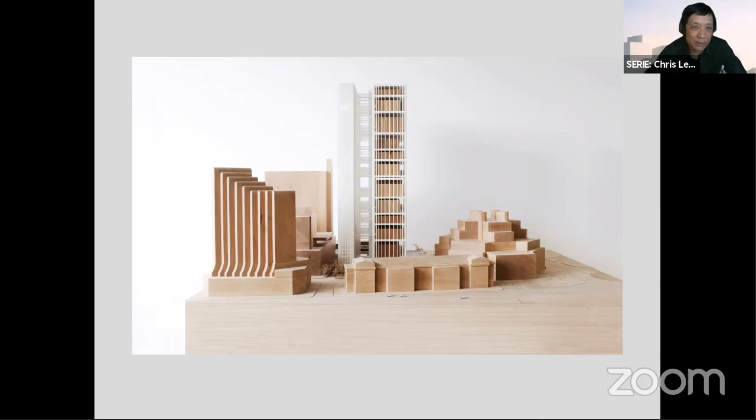So this really creates a building that is full of circulation, and is actually very, very solid, because the courtrooms have to be completely sealed from views from the exterior. So our response to this was to create two towers linked by 38 sky bridges, so that the front tower is composed of a series of open platforms, and on those platforms we place the different courtroom sizes. And this tower is completely public, open to the public.

And the back tower is the judges' tower and the staff tower, and linking them together are the bridges that we talked about. So the two towers are shifted slightly, so that with the slenderness of the back tower, light and air are brought between the towers. And the two buildings, the old and the new building, are connected by a small one-story entrance pavilion.

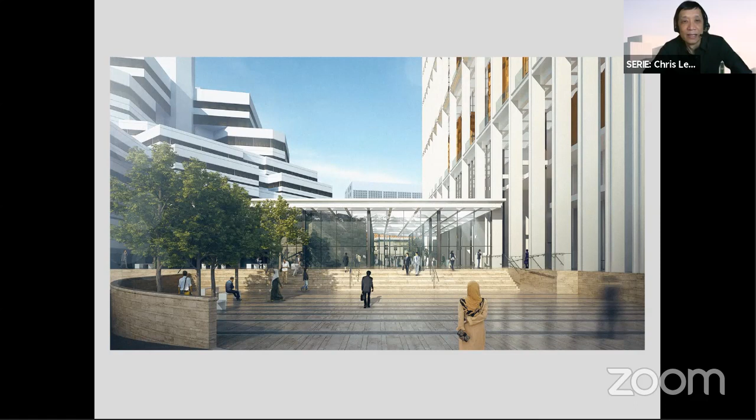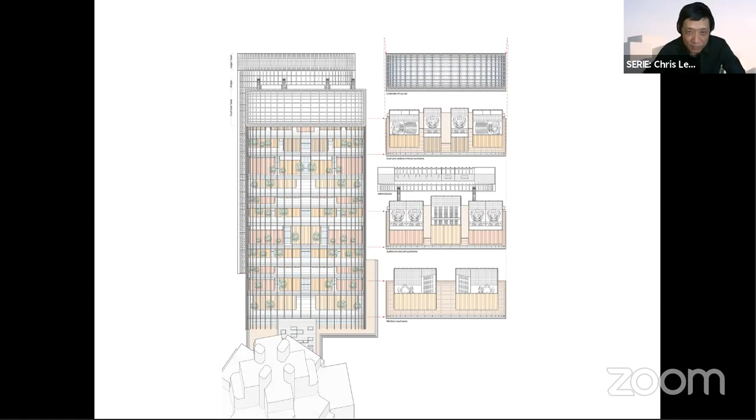So we really wanted to bring these two moments together, where both the granularity of the roof and the granularity of the shop houses is placed at this open platform, in a single gesture. So in a way, it is a high rise made up of several low rises. So the courtrooms are therefore placed on open platforms. These open platforms are landscaped. They are gardens for repose and to calm down, because court proceedings are very stressful. So the public could come out of the courtrooms here and begin to enjoy this space.

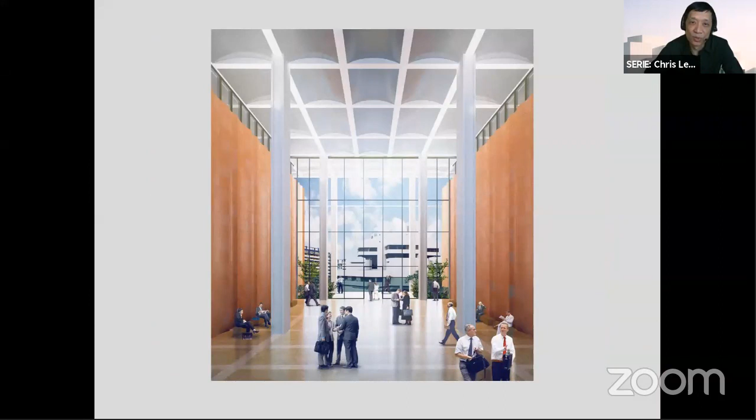So with regards to the materiality, we thought that there's something very beautiful about the simplicity of the shophouse roof, and yet the way in which it is able to create incredible difference through color variation, but also through profiles. So all the entrance or the courtrooms are created by a precast pigmented concrete that is then stained with color sealers. It is profiled in such a way that vertically, as your eye moves upwards, you can see that the gaps between the fluting opens and closes. And as it moves horizontally, you have larger and smaller panels.

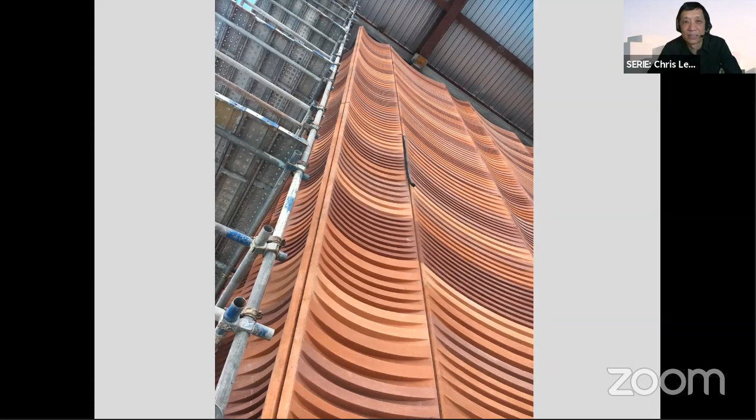So these panels are very, very large. They are 6 meters in height, cast as a single piece, and then they are craned onto site, and then they come together, pieced together on the site itself. So as they come together, I think there's a certain softness and a certain handmade quality that we really like about this project, despite the surface having almost 20,000 square meters of area.

So this richness that I was mentioning to you about also comes across in the walls of the courtrooms as you begin to approach them. So on the interior, it also takes on the same fluting profile for the courtroom, and this is just one of the mock-up rooms. As you begin to see, they're basically made up of CNC birch ply with the gap for acoustic performance behind it.

The back tower is designed to be very, very simple, cost effective. It just uses a very simple grid that expands and contracts where you need them. So the vertical grid contracts where the cores are, it opens up and dilates where you need views and light. And as you move up the tower, the horizontal grid also compresses and expands to create a rhythm to draw your eye up to the sky.

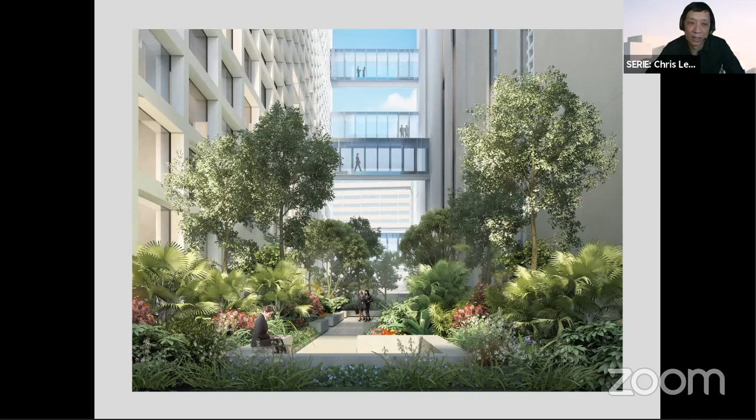So at different parts of the city, you can see how that tower begins to be wedged into little vignettes of the city. So the bridges are altogether 38 bridges placed where it is needed. I think the accumulation of the bridges to us is incredibly exciting. And the spaces between the towers are a lush landscape garden for the public to use. This is the view just next to, between the two towers, and this is still under construction, the interiors here.

So I always like these construction photos a lot. This is a moment I enjoy where you begin to really see the three periods in history of Chinatown. On the foreground, the shop houses. At the middle ground is the high rise of the 1980s, and then our addition at the back. So yeah, I think I'll stop here.

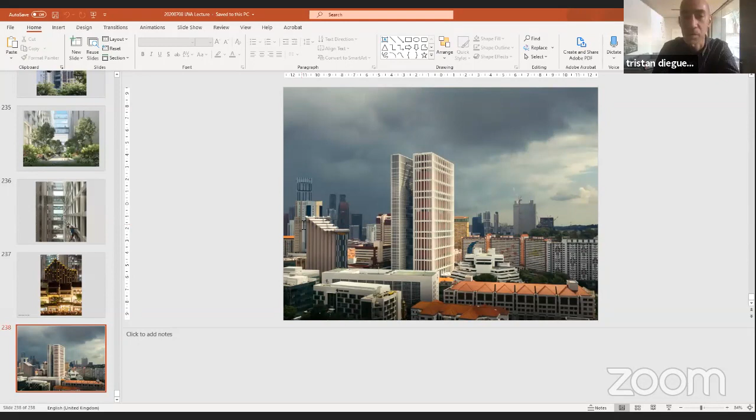I think many of us fell off the streaming. I cannot see it either. I'm here if you want me to read it, Tristan. I have it right here.

Mariana was saying: I researched you yesterday, question about Tower of Tables. As I could see, you went onto wood structure architecture. And then she adds, aren't you afraid of it becoming the rule for worldwide buildings? And that way it might take us to the point of consumption where not even sustainable forests can hold the demand.

I think that's a good question. So I think no, I think that's not how you think about combating climate change. I think you have to look at sustainability in a very holistic way, and you need to balance between tackling climate change versus the culture and the social norms and the economic models that we have right now. Now, the cultural norms, the social norms, and the economic model that we have today will not change overnight. They never do. They will change gradually and in step. So you need a certain approach that is able to buffer or to regulate this transition in a much better way.